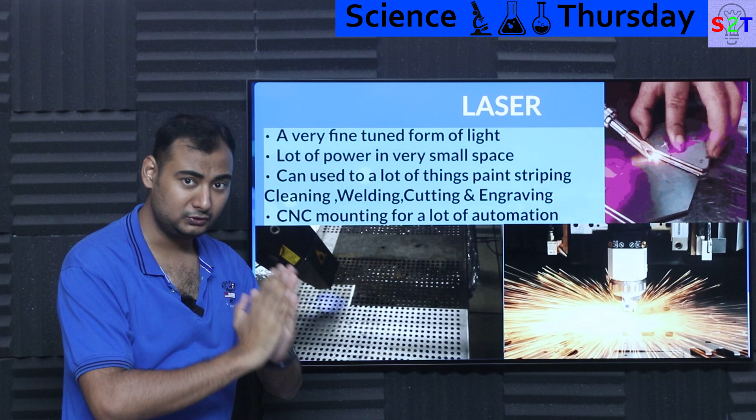Let's dive right in. First, a brief overview: what is a laser? Laser is a very fine-tuned form of light. What does that mean? If you look at any screen, LED, or light, it generally has a whole spectrum, lots of frequencies, lots of wavelengths. If you can fine tune it so it only produces one spectrum, as tight as possible, then you have very fine-tuned light, which is laser.

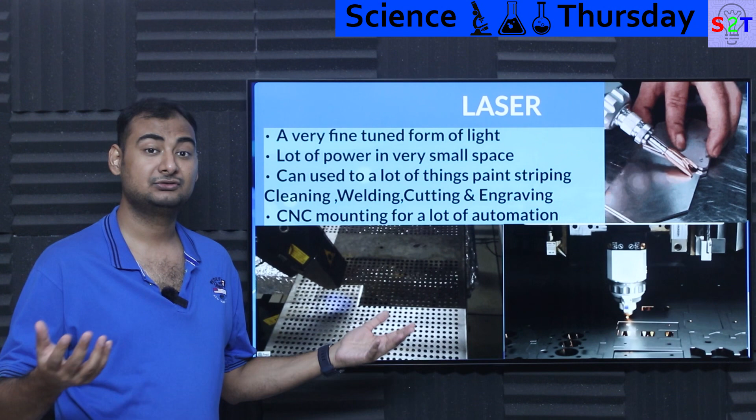The core aspect of laser is that it's not that powerful. You'll read specs like a 100 watt CO2 laser and think that doesn't sound like a lot. You have 100 watt light bulbs, other equipment consuming 100 watts. Even industrial scale systems are like 2 kilowatt, 3 kilowatt, not that much. A normal CNC router would consume more power than that. So what's happening?

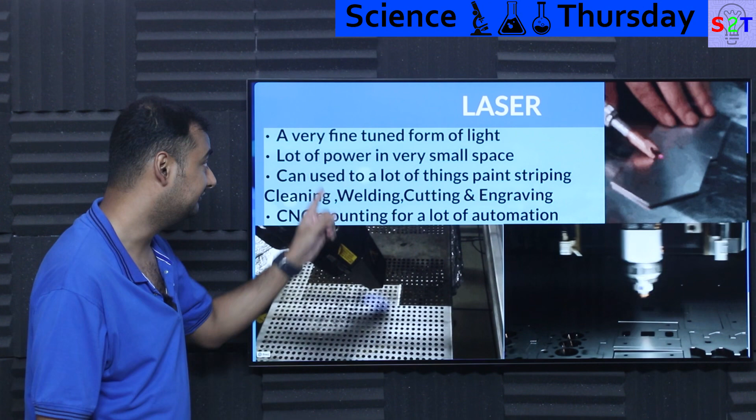The core aspect of laser is that it can pack that much power into a very tiny spot. That's the critical aspect. Given that it's very fine-tuned, scattering is almost negligible, especially if you select the right material. That creates a very powerful scenario, and you can do a lot of things with laser.

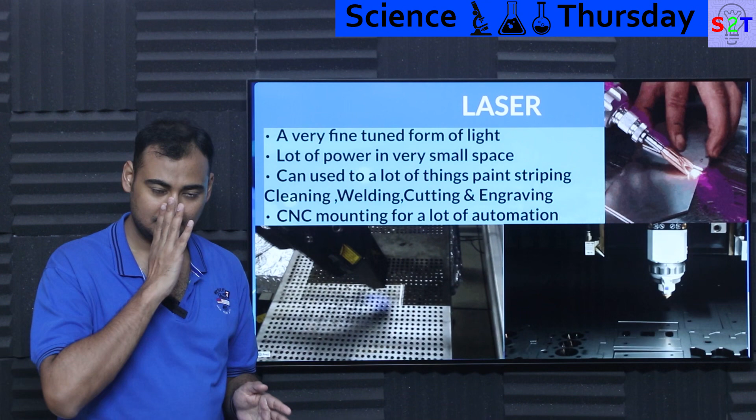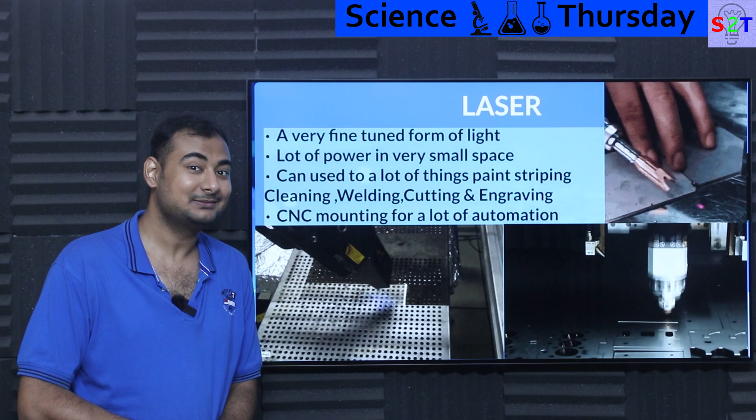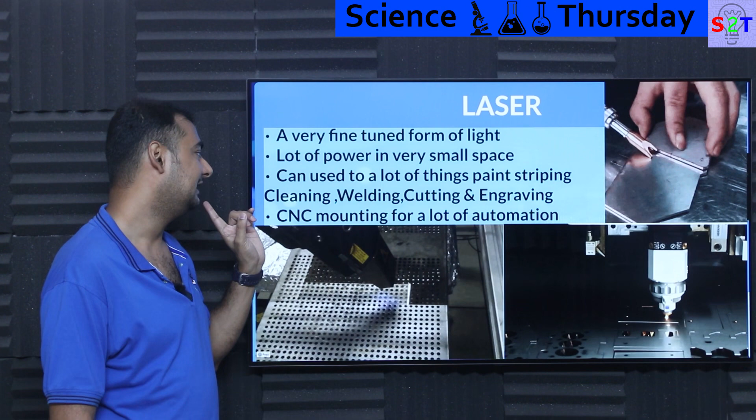The most common thing is, oh, we're gonna cut with laser. Not necessarily, you can do amazing things. For example, paint stripping. You may wonder who needs paint stripping at a scale where you'd build tools for it, but it's a big enough industry that people made tools for that. Rust removal is also a very big thing in industrial environments, this is a handheld laser used to remove rust or paint.

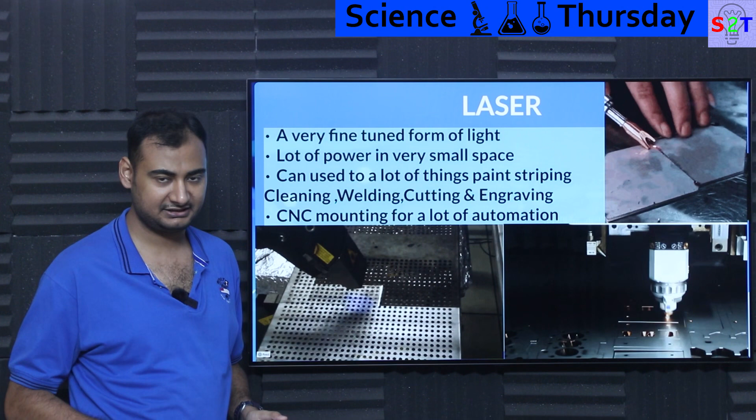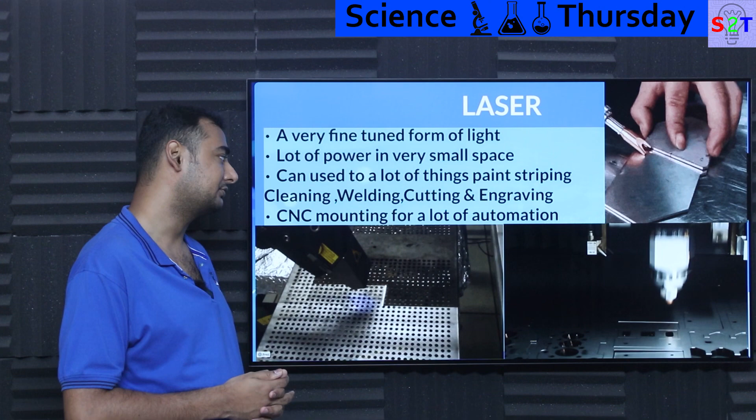You may think it can only cut, but again it's depositing heat. If you put anything else there, it will melt it. So you can do welding, cutting, and also engraving. There are a lot of things you can do with a laser system if you know how to use it. CNC mounting, basically computer numeric control, allows you to do automation, meaning you can do large batches of work. That's the whole point of laser.

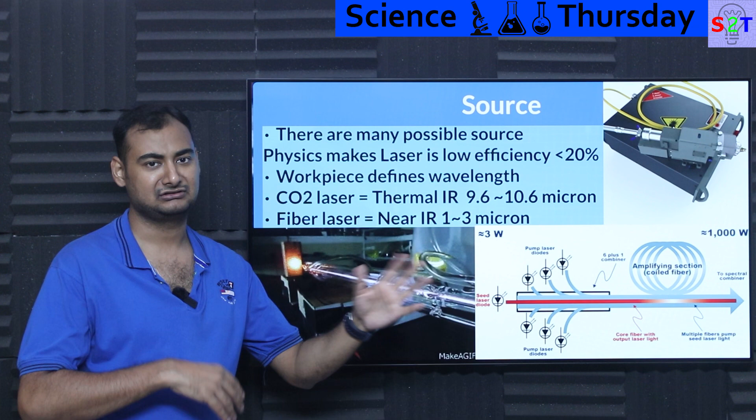So how do you create a laser that can do something like this, where I can cut 2mm steel here? There are many possible sources, so don't worry if something isn't covered, there are many possible sources, but you have to understand the core aspect.

Physics does not allow laser to be very efficient flat out. Realistically you'll be lucky to get even 20%. What I'm counting is power taken from your plug versus what goes into your workpiece. If you take 1 kilowatt, realistically only about 100 watts might go into your workpiece. So if somebody sells you a very powerful laser, or says CO2 lasers are very inefficient while fiber systems are around 4x more powerful, be mindful that this just means low efficiency, not that it's close to 100%. It's very low efficiency, based on quantum laws, so it cannot be tampered with or worked around. Some designs claim achieving almost 40%, but that's a super duper hyper best case scenario.

So realistically, don't freak out if you buy something with very small laser power and your energy bill goes crazy. That's the whole point, it's very inefficient.

Now, what wavelength of laser do you use? Since it's a spectrum, it can be anything, a microwave laser if you want, or an X-ray laser. Figure out the optics for it, and you can do it, whatever you want with it.

So the workpiece defines the wavelength. If you're dealing with woods, ceramics, or thin materials like acrylic, plastic, cloth, non-metallic objects in general, people prefer CO2 lasers, this is a common structure you see. Why is that? It creates infrared in the thermal range, meaning 9.6 to 10.6 microns. That's the critical aspect, this wavelength is very easy to reflect with gold. So if you have a mirror back there, a first surface mirror, meaning it cannot go through glass, it will damage the glass over time.

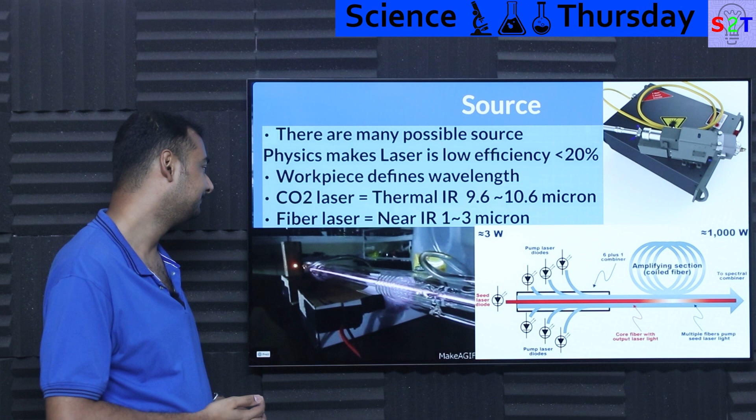But the moment you go to a big boy fiber laser, it will have a seed laser diode, and then it will have pump diodes that allow ludicrously high pumping efficiency. And because the fibers can be coiled, even though you may see the box that's this small, it could have kilometers of fiber spooled up into it. That allows really high pumping efficiencies, meaning the coiled fiber section can literally take 3 watts input and amp output to around 1 kilowatt.

You are pumping energy into the pump diodes also, so the seed would be 3 watts and the output would be 1 kilowatt. So it has a fair amount of power, meaning this puppy is in near infrared, 1 to 3 micron. At this point steel cannot handle it, aluminum cannot handle it, meaning anytime you're dealing with a laser doing some serious damage, generally they are using fiber lasers, simply because it's more efficient. It's like 3 to 4 times more energy efficient, so energy from your plug is much lower compared to a CO2 system, and it works very well with metal.

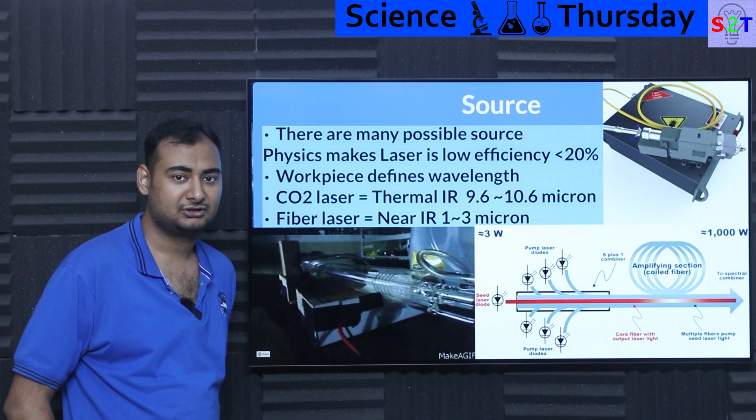So if you're talking about wood cutting lasers, that's CO2. You're talking about anything else, that's fiber systems. And be mindful, when I'm talking about fiber laser, it doesn't mean it only comes in near infrared 1 to 3 micron. There could be other designs depending on specific environments.

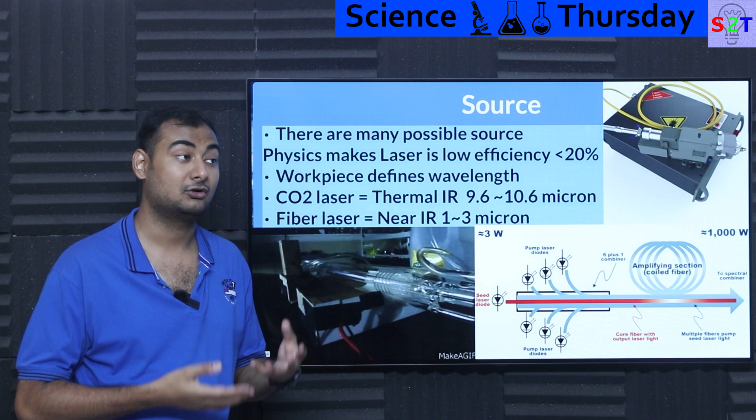For example, let's say somebody says, hey, I need to cut diamonds. It may have a specific frequency which is efficient for it. Other frequencies might just bounce off, scatter, or worst case scenario, melt. So you have to select the source based on requirement. CO2 lasers are used on skin. I had a laser dental surgery with a CO2 laser. So be mindful: right tool for the right job.

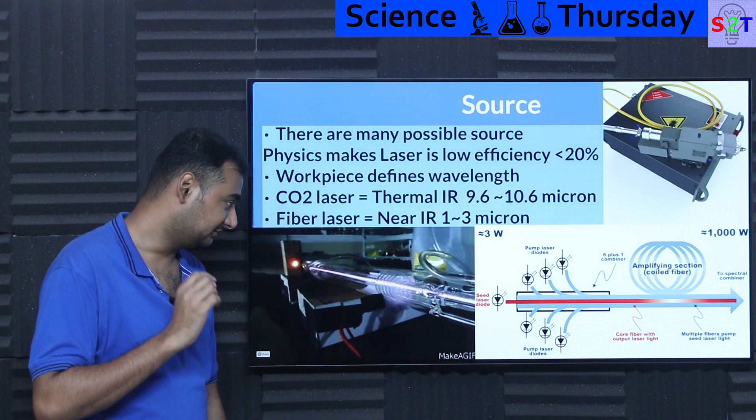That's the source aspect of it. Now, how do you deliver the laser? You got the laser, okay. You made your laser. How do you deliver the laser? That's the whole point of CNC.

Well, the fastest option is Galvo lasers. Now, Galvo lasers have a very small working area, meaning even if you're familiar with laser cutting machines, you know for a fact that they're huge, they're big boys. Now, the Galvo is very small. You'll be lucky to get even an A4 sheet kind of scale, like 200mm by 200mm, very small. However, it's idiotically fast, meaning it's super fast.

Now, why is it fast? Physics, inertia, mass. It only has to move - basically light is fixed, it only has to move the mirror, and it has to move it very little. So it can do it ludicrously precise. I'm talking so fast that this may look sped up, but it is normal time. And not to mention, this is kind of slow - I only use this GIF because it's slow enough that you can see it. In real time, some lasers are so fast that it's like whoosh, that's how fast it could be done.

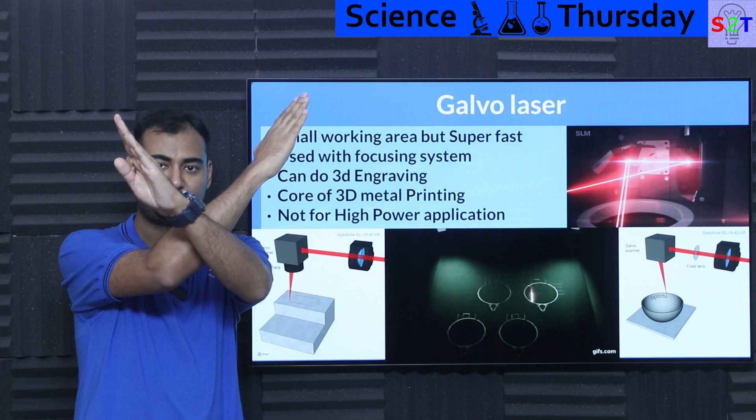So it's ludicrously fast. Now, that only gives you control in 2 axes, meaning if you have a mirror moving in one axis like this, and one like this, that gives you X and Y. How about you control the depth? Because if you do not control the depth, the focusing will be off, meaning the laser goes to a focusing point and then it spreads out. If it's spread out, it's not going to do anything. So you need that focusing system.

Now, the focusing system is very expensive given the fact that it has to either deal with the laser when it's not very concentrated, or be made out of something that can let laser light pass through it without damage. Again, it's possible, that's why we have it. It's just expensive. Mirrors are surprisingly easy.

Comparatively speaking, mirrors are much easier than lens systems.

Now you can do 3D engraving with this. For example, let's say you are a tool manufacturer making amazingly, idiotically expensive tools. You have to mark it. If it's a precision ground equipment, you're not going to punch mark on it. You can't use printers either, because that ink will not last long. So you utilize laser engraving.

The engraving aspect of it has to be done in 3 dimensions, because the surface level will not be exactly the same, and most of the time it will be a curved surface. So there is a calculation algorithm that is constantly moving the Galvo servos and lens autofocus, so you get a proper etching. These things are very fast, and this is the core of metal 3D printing.

Anytime you hear about metal 3D printing, something like this is generally using Galvo servo systems.

Now it is not for high power application. While a mirror can in principle reflect a very high power system, good luck finding a lens that won't go poof if you try to send 40 kilowatts through it. You can find it, but at that point there's more complication involved. Even though you can in principle reflect light very far, the focusing atmosphere may end up requiring a scenario where you have to pull vacuum for it.

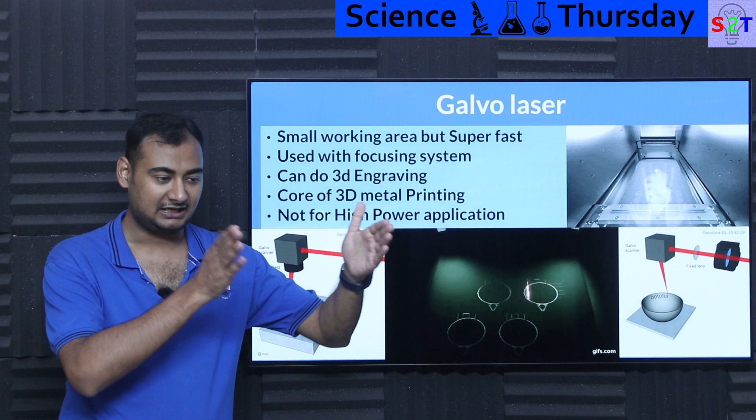So it's generally suited for low power application, but very fast, meaning in a factory environment where they're using this for engraving, they'll have a conveyor belt system on top of it, and many people use this for running a business.

You might think, why the heck would you use something that has this small area? Say you're running a keychain engraving business, and you think, why should I buy this, because it can only process one object at a time, while I could buy a big laser system that processes 8 or 12 at once. But processing 12 at a time will take much longer, while this one is quick, done, go home. These are very fast.

If a customer comes in and says, I want this design, you take the file. How long it takes you to process the file is up to you. But after the file has been sent to the CNC, this puppy is just done, go home, sweet dreams. So speed matters, and in those scenarios, this is the only way.

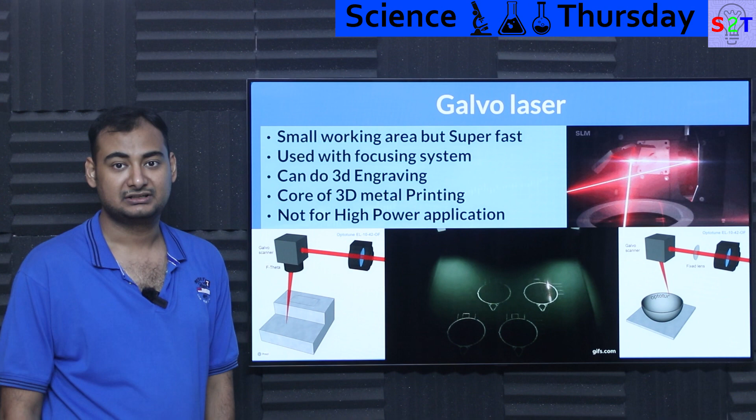So Galvo servos are generally preferred for fast applications where you need speed. Then we go to the most common system, the CNC Gantry system. Basically anything that you see is just CNC Gantry, the most common type of tool. I'm reasonably sure even if you've dealt with 3D printers or a normal CNC router, that's what we're talking about. It allows for very large work areas.

Now laser can be spot or remote. Spot lasers are generally very low power, like 10 watt, 30 watt, 50 watts -- the maximum I've seen is generally 50 watts, and I'm pretty sure that was overrated. At that power it's light enough that it doesn't justify the cost of having a laser tube and bouncing it through mirrors. But it becomes necessary once you touch 100 watts, because the laser tube will be this big -- CO2 lasers are this big. At that point you have to have mirrors reflecting everything, like this system. It has mirrors reflecting light through it.

Now it does allow a very large work area -- you can have multiple meters of working area. That's an awesome aspect of it. Now, how do you reflect the laser? Well, the normal way is using mirrors.

Now mirrors have this consequence that they're exposed to the elements, so to speak. Even in a sealed environment, you have to understand you're literally vaporizing things, so there could be actual steam. Not water steam necessarily -- it could be other fuming gases too, which will destroy your mirrors. That's why whenever you buy any branded laser system, they require an air filtration system, because it sucks the air in, and because there are so many fumes, it requires filtration before it can exhaust out into the atmosphere.

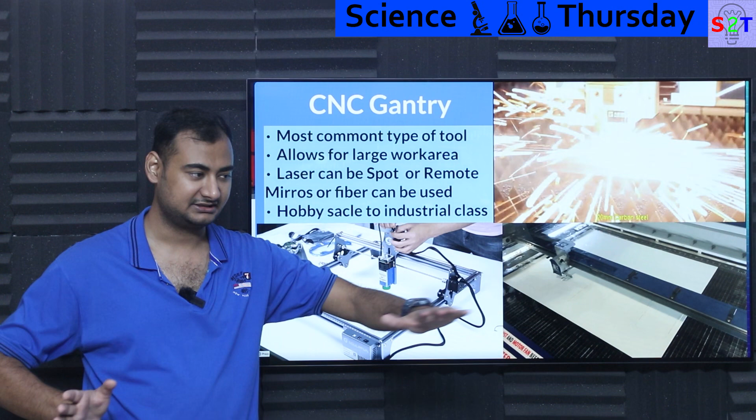They're just like, 'lol, that was powerful.' To give you context, the steel was thicker than what you see in JCBs, basically cranes and bulldozers. The laser cutter just took a metal sheet of that caliber, cut it out, tack welded it, done, go home, sweet dreams. So these things can be ludicrously powerful if you want.

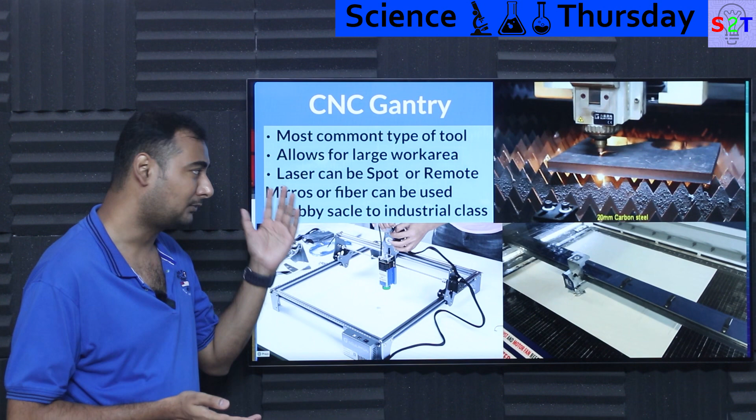In terms of scale, how small you can buy or how big you can make it, it's industrial class, meaning you can buy things that process multi-ton metal sheets down to something that just works on paper. CNC Gantry is a very common system. Spot systems are generally used for hobby level, remote mirror systems are used for non-metallic objects, and fiber is used whenever you have to make love to metal.

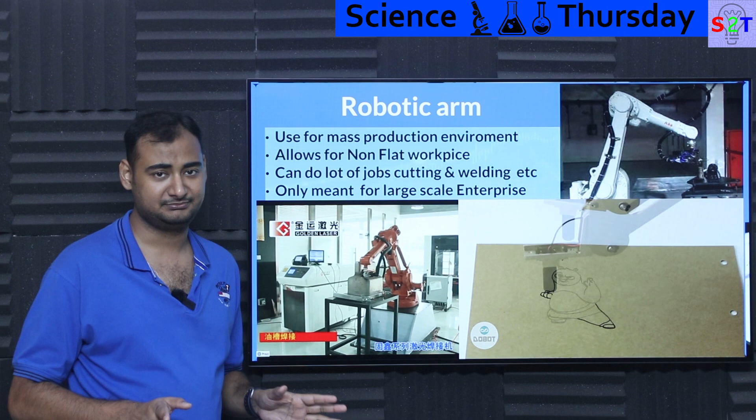So this is the CNC Gantry, the most common and popular aspect of it. Then we come to the rare puppy, the robotic arm design. This system is only used for mass production, so you will rarely find any video about it or people talking about it. It's very rare because it's only made for production environments.

It has only one job: it can work with non-flat workpieces, meaning the majority of laser systems assume your workpiece is flat. Even a galvo system, even though it works with a curvature, the lens is flattening the image, so it's literally X and Y. All laser systems are X and Y.

This system allows you to work on, let's say, a car chassis. Say your car chassis is half-built and now you have to weld something to it - again you can utilize laser there. ABB makes a lot of these lasers.

Again, somebody smart figured out how to make a laser engraver - this is a toy kind of scenario, but you get the point. If you're dealing with something with too much curvature or physical movement requirement, inherently you can't have a laser that bends, but you can bend the source. So you can have a fiber laser that's bending, allowing for non-flat workpieces, and it can do a lot of jobs.

Just as lasers have multiple applications - paint stripper, surface cleaner, welder, cutter, whatever have you - the same can be done with a robotic system. Your supplier will define whether your fiber laser can go up to the level where, rather than welding, it can do melting. That's up to you. There are options where all these machines come into a 3-in-1 setup, one tool head with 3 options.

So it's only meant for large scale enterprise scenarios, not something you and I are going to see. Gantry systems are very common - I've seen many Indian businesses buy into this sort of system and they're printing money with it.